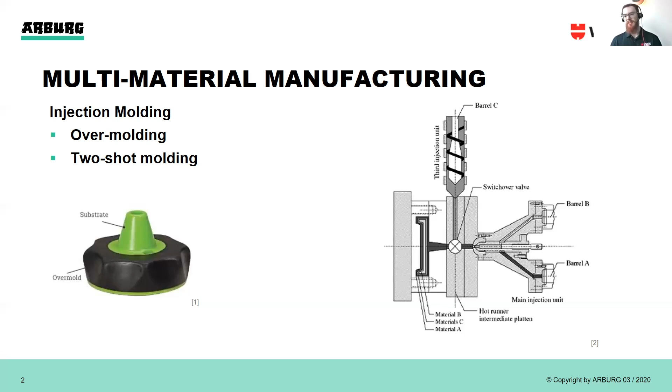With that, I'll continue on to the next slide, and we're going to be getting into what it actually looks like if I'm having a mold made - if I'm a manufacturer saying, okay, I'm making this part, what actually is happening? With injection molding, there's an entire industry devoted to this itself - there are conferences just on injection molding, so I'm not going to be deconstructing the entire process, but this serves to give you a representation and an understanding of how I'd accomplish something like a toothbrush or a power drill that has multiple different materials on it.

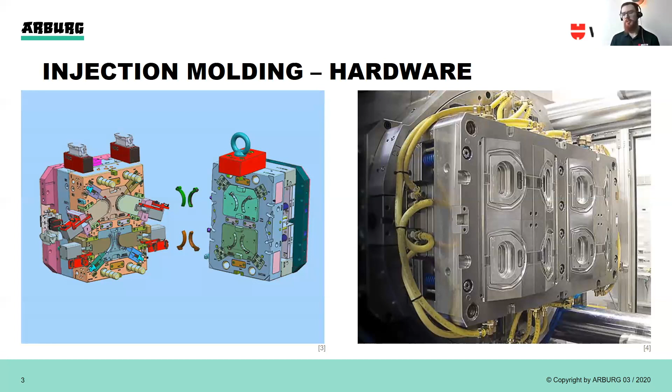I can talk about some of this, I love talking about it, it's not a big deal. So sink marks, it's just something that comes with cooling. It's a common known problem in injection molding. It's part of the cooling process that affects this, and the thickness of the part.

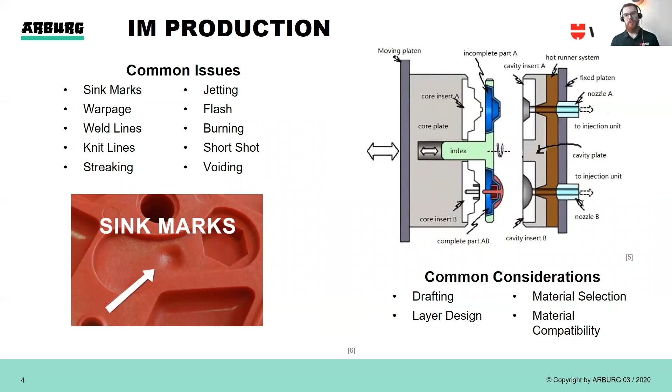That's inherent to it. And with multi-material, it's exacerbated actually, because you have to design for this. It's not that you're having to remove this, it's not just a common issue because I did something wrong in the actual process. I have to design for it ahead of time, and it can be difficult.

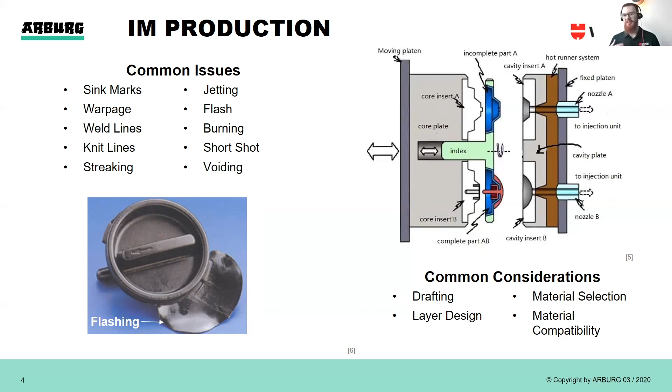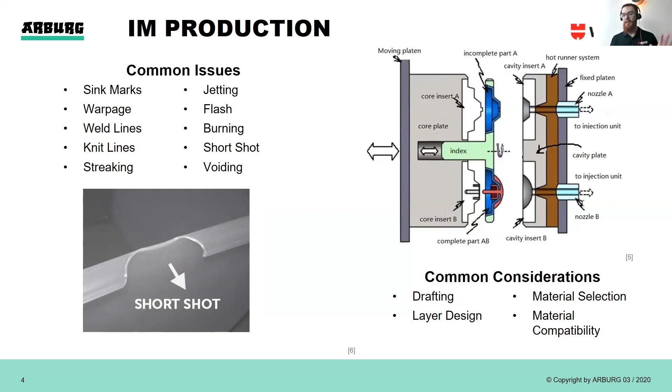Moving forward beyond that though, there are other things like short shot. This is when the cavity doesn't completely fill. Point being, there are lots of different things that can come up. If we see the schematic on the right, we're looking at core insert B. I'd like to draw some attention to that.

Basically, these are parts that in multi-material manufacturing with injection molding—I'm manufacturing that blue incomplete part A, or not printing, I keep saying that, I'm focused in the industry—I'm manufacturing that and I'm injecting that into the mold. And then when it's done, I'm adding more to that.

How do I do that? I'm moving it literally to another cavity. I have to have multiple cavities for the same part because it's got to be stepwise. It's got to be component based, and I'm doing one, and then it's got to fit into the other, and then I'm literally injecting over that part.

Something that can come up, as you see with the ones on the right: the blue one is just a simple one, incomplete part A, and then complete part AB. It's putting material over that. And if I'm using a different base material for that blue part, something that's flexible, something that gives under pressure, and then I turn around and apply thousands of pounds of pressure to that part, it can fail.

You're restricted innately in some of these design considerations for injection molding. It doesn't let you have full control over the process. All those issues play into that design process. I mentioned wall thickness - you can't have variable wall thickness very frequently in an injection molded part. It doesn't work well. People just know that in the industry and act like that's something you have to be smart enough to account for. But maybe it's something you want to overcome and still design what would be best for the end user or your process. This is all to say there are lots of considerations, and maybe some of those are overcomable.

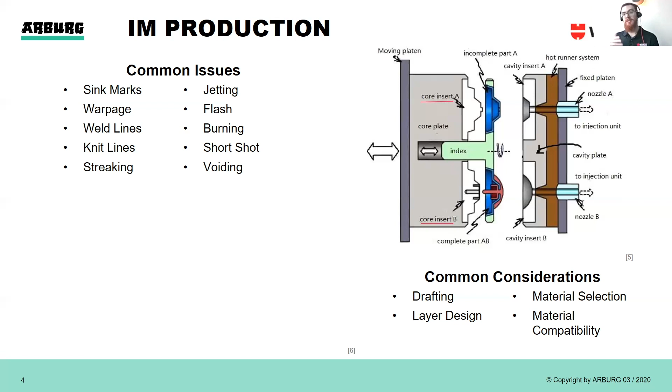One that's not overcomable, though, is material compatibility, which I'll talk about. I'll pull up this chart. This shows there's a lot going on, both on the chemistry side as well as the mechanical side, and this is especially true in the 3D printing process. ABS with nylon 6 - is that compatible? It is, but some of these others maybe not. So something as basic as materials - if you pick the wrong things, you're destined to fail because you'll have an immediate part failure. It won't have that strong interface I was talking about before. You would have rubber on your toothbrush just peel away. It's not desirable, so you've got to have an understanding of that as well.

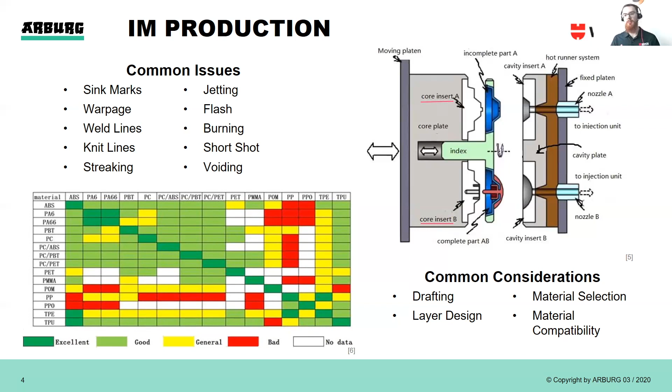If you have any questions on this, feel free to reach out to me, and I'll talk more on this, but it's getting more and more technical, so I'll leave it for another webinar. This sets the framework for what we're looking at and comparing with some of what we're going to be talking about today on the ARBURG parts. With that, Gerry, if you'd like to take it from here, I'd be happy to hand it over.

Thank you very much. I appreciate that introduction to multi-material, two-shot, and overmolding. So that brings us into the ARBURG plastic freeforming process. Here's an illustration of the APF process for short. You may have noticed that a portion of it looks similar to a molding machine - that's no coincidence, as ARBURG's main business is injection molding, and they've been doing it for over 65 years. They use that material processing knowledge to create the freeformer.

The process starts by loading standard molding grade thermoplastic pellets into the hopper at the top right. The system has active drying to keep pellets dry while they wait to be printed. The material then flows through a screw and barrel as it's plasticized or melted, and then enters our printing head, where a piezo opens and closes the nozzle to create a string of microdroplets. We use microdroplets instead of a filament because we can achieve a far higher density with droplets. The droplets are printed, and layer by layer we start to see a part form. The printing nozzle stays fixed, and the tray moves underneath, carrying the part.

Some additional notes about the process: we have a relatively high temperature range. We can get that nozzle up to 450 degrees Celsius, or 842 degrees Fahrenheit. The build chamber, which you'll see in the next slide, can get up to 200 degrees Celsius, or 392 degrees Fahrenheit. Also, you might be interested to know that on average, we're using a 0.2 millimeter layer size for our printing droplets.

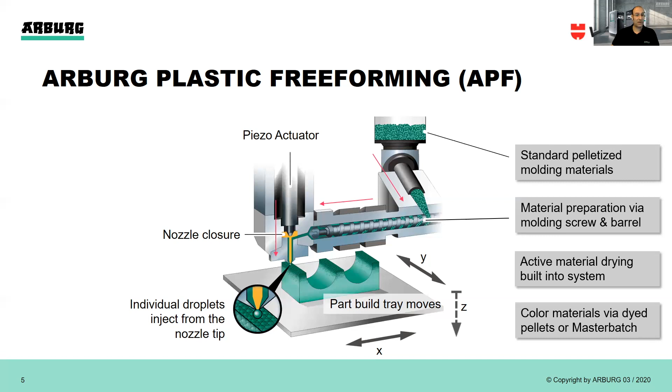Creating multi-material parts using real thermoplastic materials is what makes the ARBURG Freeformer a unique offering in the additive industry. If we look at the system image, we can see how it manages that task. The key is 3 individual nozzles, each capable of printing a separate material, and when used in concert, 3 materials are extruded into a single build. The build tray is housed in a temperature-controlled environment that can maintain temperatures up to 200 degrees Celsius.

This opens us up to a variety of materials, starting from your standard plastics, such as ABS, PC ABS, maybe a TPU, all the way up to our high temperature engineering plastics, such as the Ultem family. If we look over on the left-hand side, we see a bicycle brake lever and a housing with an integrated gasket - these are 2 examples of the virtually limitless combinations possible.

If we look at that plate and gasket, what we see is a red ABS and a translucent TPU used together. You can also see our water-soluble support material displayed underneath the overhang. Our process utilizes support material where it's necessary, and that support material is water-soluble - that's right, just warm water, no chemicals needed.

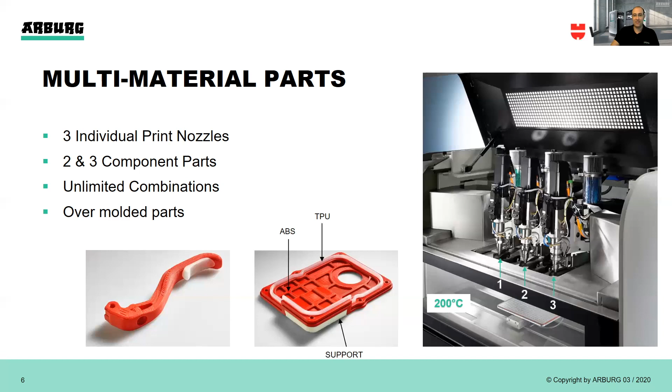So let's take a look at our first example. If you're a baseball player or you played in the past, you're probably familiar with DeMarini bats. DeMarini is a Wilson sports company and sells some of the best bats available on the market. Their R&D manager reached out to ARBURG some time ago to see if we could help with a problem he faced.

When designing aluminum or composite bats, the end caps are made of a proprietary plastic. To test new cap designs, the engineers create a model in CAD, get a molding tool cut, and injection mold a handful of parts. This process takes 12 weeks from art to part, as the R&D manager coined it, and was the only way we were able to test designs and their materials. He was searching for a way to offer the engineers more options, to innovate and to try new designs before settling on one and heading into production.

The biggest problem turned out to be manpower. Buying new milling machines and molding machines was a simple solution to open up capacity for the designers, but finding operators was a real struggle. So they decided to look at other options.

3D printing quickly floated up to the top as a way to get around creating tools the traditional way. Metal printing can create tooling without having to machine it. Some polymer printing can also create a tool for low volume of molded parts. There's also a company that prints a dissolvable mold. All of these are decent options, but they weren't a complete solution because the process would still require the molding of the parts.

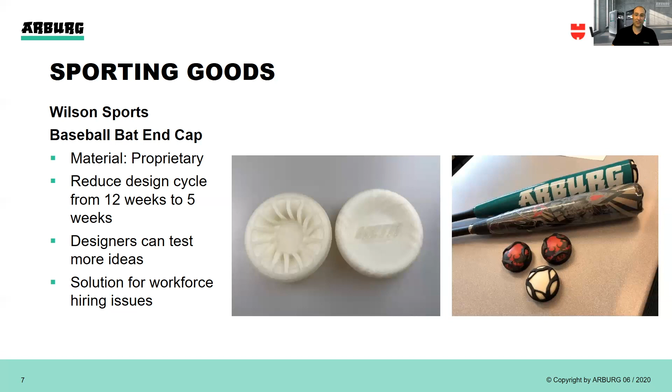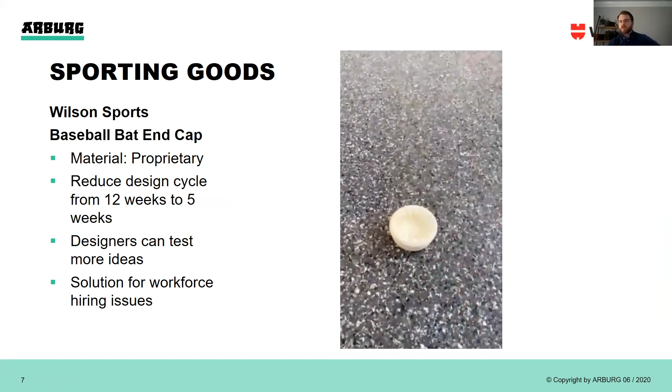And Gerry, as you show it getting beat up, I just want to add, you mentioned that 3D printing rose to the top because it was known as rapid prototyping for 20 years. So it makes sense, but I think rapid prototyping and rapid validation are two different things, and validation very much includes the end material you're going to use. If you print that on an off-the-shelf filament you can buy anywhere, yeah, you can replicate the shape, but you might not be getting the dynamic properties, and you're also not validating on the material you want. So you just can't lose that point of how open and flexible ARBURG is to be able to print at those high densities in multiple materials.

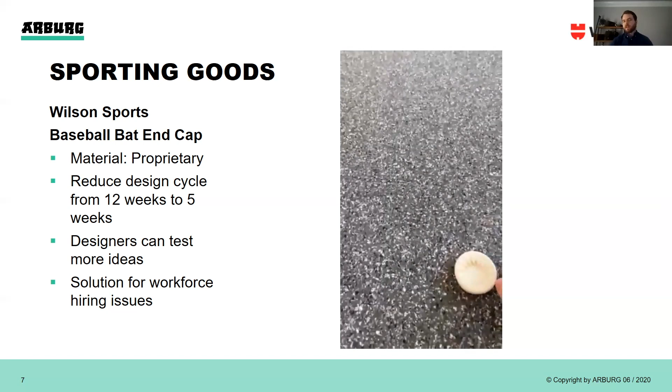And oh, by the way, if you're making walkie-talkies, if you're making baseball bats, you can go art to part on your material. It's such a big point, it's hard not to just make sure it's highlighted. Couldn't agree more, AJ. Thank you.

Let's take a look at the next example. So this is an example of a multi-material tool. It's an end-of-arm tool that ARBURG uses in their own manufacturing facility. You can see here a green part, which is a handle that ARBURG uses in a variety of panels that fit on their molding machines and accessories.

Prior to automation, when the handle was molded, the part itself and the sprue would eject into a bin, both falling in together. Once that bin was full, a person would remove it and replace it with a fresh bin, then manually separate the parts from the sprues, putting the parts into a storage bin. It was a very manual process. Plus, there was a risk of the sprues freely moving around in the bin prior to sorting and marring other parts as they dropped in.

ARBURG engineers tried to create an end-of-arm tool using suction cups to grab the part, but the angles and the area inside of the part didn't allow enough room for the part to be grabbed. As they say, practice what you preach. So we turned to 3D printing. A multi-material tool was created.

They used a rigid frame and a flexible internal TPU bladder. Lastly, they added air connections to the rear of the tool to inflate and deflate the bladder. The tool is inserted into the part, the bladder expands and presses against the part, creating enough pressure to hold it steady as it's removed from the mold and placed on a conveyor belt. 3D printing gives designers the freedom to create and solve those issues that traditional tooling just can't.

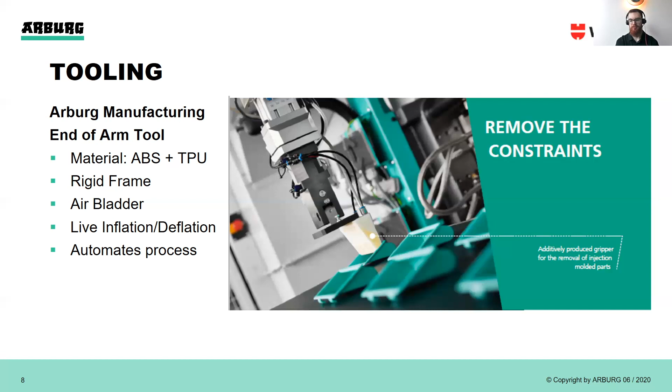Now the process is fully automated and runs lights out, saving on labor costs. Let's take a look at this process in action.

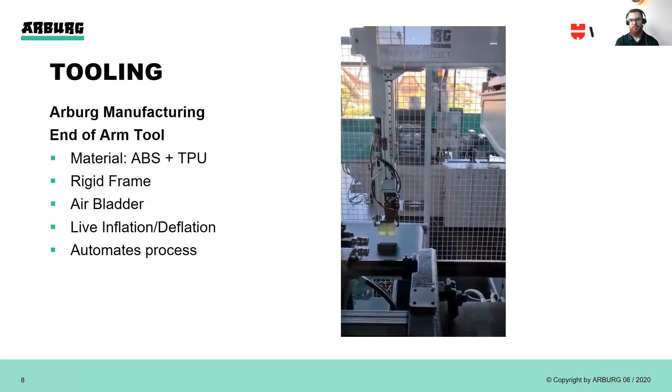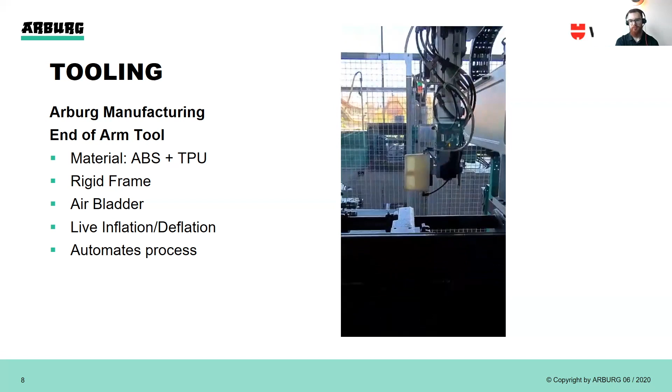Here you can see the robotic arm dropping the part. This time it's done as a black part instead of the green one we saw in the picture earlier. We've got a nice zoom-in look at the tool itself. You can see the translucent TPU bladder right towards the left.

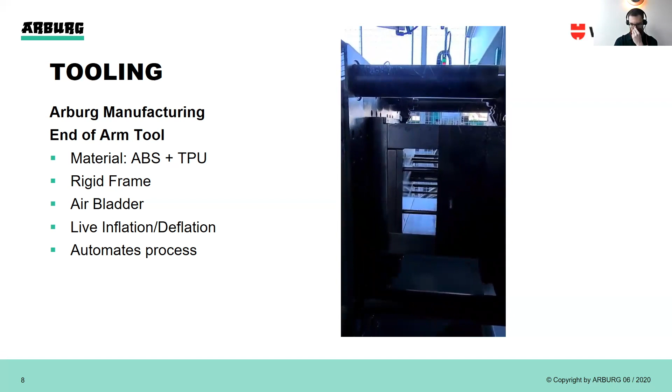And here you see an injection molding tool. This is just a one-shot version, or a one material version, of what Jacob was describing earlier. As this tool opens, you can start to see the complexity, the size, the thickness of the metal used there. You can imagine how expensive these tools get.

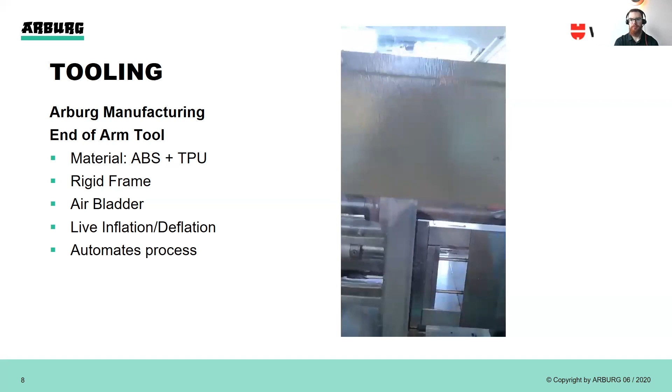All right, excellent, so let's move on. We'll touch briefly on 2 additional examples in our remaining time. Here you see a flip-top cap.

Most of the packaging that we see in our daily lives is made of polypropylene. And from what I understand, there's a lot of challenges working with polypropylene. Jacob, maybe you can give us a quick overview of some of the challenges we might run into.

Yeah, Gerry, I'd be happy to. On top of normal injection molding process issues I was talking about earlier, polypropylene especially is a very unique plastic, both in injection molding and 3D printing. I'll talk especially about the 3D printing side of things because frankly, it's just not even used. It can't be used because it doesn't really like to stick to itself very much unless it's got that very high temperature already at its interface, allowing for high bonding. But with many different substrates that you're putting it onto, it doesn't have that great of adhesion.

This is actually due to some of the chemistry side of it, where it doesn't have as many functional groups, all that crazy stuff. But really, this goes to say that if you print it on a print pad, most of the time it will just come off. And it doesn't even like to stick to itself sometimes, for instance.

But then it's also very crystalline, and what that means is if it's got a high degree of crystallinity, it can experience greater shrinkage. One thing that overcomes it with injection molding is when I'm injecting that hotter material into that mold, it may be cooling, and I may have to literally wait and compensate with additional pressure to make sure it's completely filling. But even then, you're experiencing significant shrinkage. It's a common issue, as I was saying earlier, with that steel-safe kind of thing. It's something they have to account for and just hope they get it right.

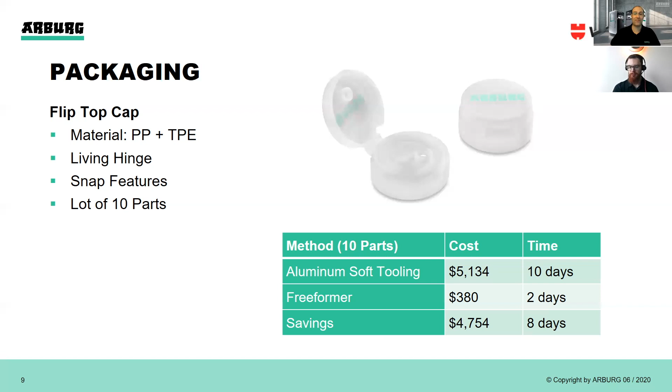Here you see an example of an overmolded flip-top cap. This is printed in polypropylene and TPE. Now, you can see some cost numbers there, and to be honest, the molding costs here were calculated based on a single material mold, so doing a 2-shot mold would likely be far more expensive. But even with that advantage on the molding side of the numbers, you can see how much of a time and cost savings is gained by printing the part versus molding it.

And lastly, let's take a look at a larger 2-component part. We have a customer that was looking for a method to bypass tooling for their prototyping, similar to Wilson. However, their reason wasn't to get more creativity from their designers. It was to speed up the functional testing of their design. This is a necessary process before entering production to assure that your parts are going to perform out in the real world in the manner that they're designed to.

The results of the printed part, when compared to a molded part, were excellent. The part performed as well as the molded part and gave the engineers enough info to move forward with their design.

The takeaway here is that a printed part in the same production material, something that AJ commented on earlier, will demonstrate similar testing results to a molded part. The key is materials—to speed up your design process and do your prototypes in the same material as your final production materials. And that's why they turn to the Freeformer.